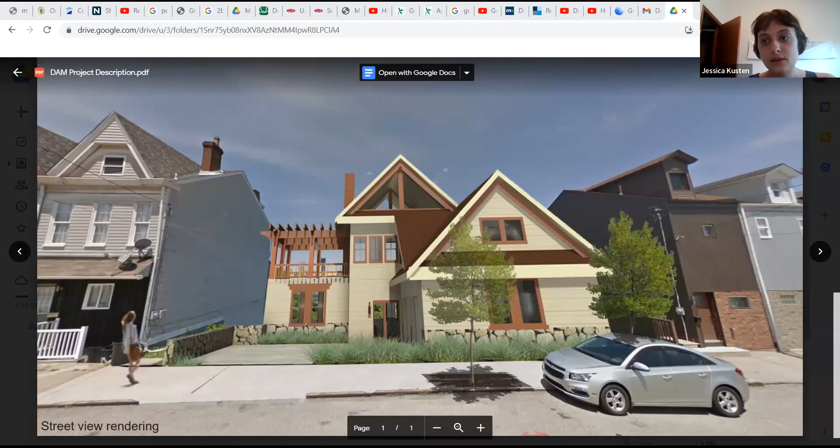All right, so I'm starting with a render of how the house would look on the street. There's a significant setback for a portion of it, so it doesn't take over or appear too large or separate from the other houses. This is just a render, but actually it's a pretty good depiction of what it would look like, so it looks pretty close to what it will be.

Yeah, definitely. We're trying our best to comply with all of the zoning regulations, and I think so far we are succeeding. There are requirements around landscaping to shield parking out front, and requirements limiting the size of retaining walls, so the house isn't such an imposing or bad presence on the street.

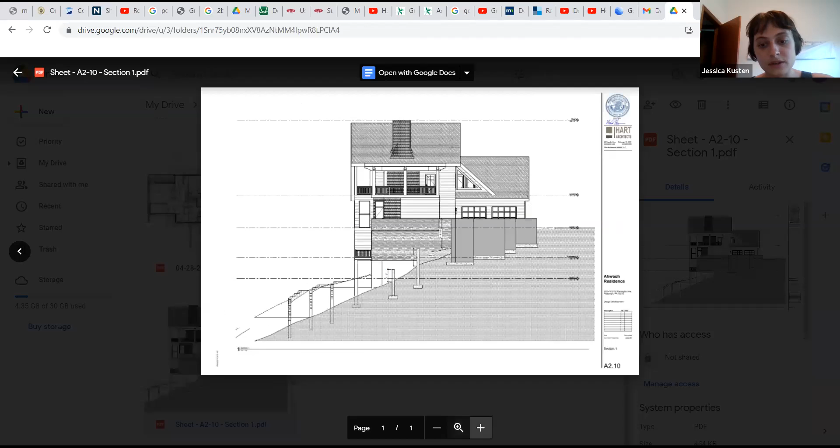So this is what the neighborhood would see. We're also working on stabilizing the slope because this is a large building with significant excavation involved. I think a main concern is the amount of excavation that will happen, and we're moving forward responsibly, designing retaining walls that keep the slope stable while also not being an oppressive presence on the hillside. The plans really follow the model of the rest of the houses on the street as well. There's a floor below grade, and then two stories above, so it doesn't divert too much from what's already there.

Sorry to interrupt, but is this in the steep slope overlay district in the zoning district? Yeah, it is. Okay, so you're required to go to the planning commission first to get approval? Okay, thanks, yeah.

So what will happen is after these retaining walls go in, the whole thing will be landscaped. The goal is that in the end, the slope or landscape doesn't appear as touched as it will be. That's also for soil stabilization too.

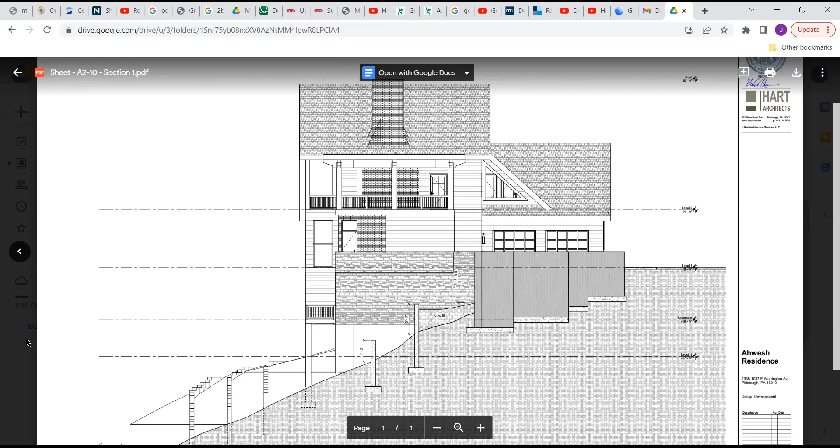So I think if this would count as the formal meeting, ideally this would have as close as possible to what would be the final design. If there are some adjustments, I can double check with the staff for the ZBA. It may be the case that if it's substantial enough, you might need to come back for an informal meeting, still held with the community, but not counting formally, in the sense that it wouldn't require another 30-day period for public comment, but it might still be important to come back and update the community about the change with the variance needed.

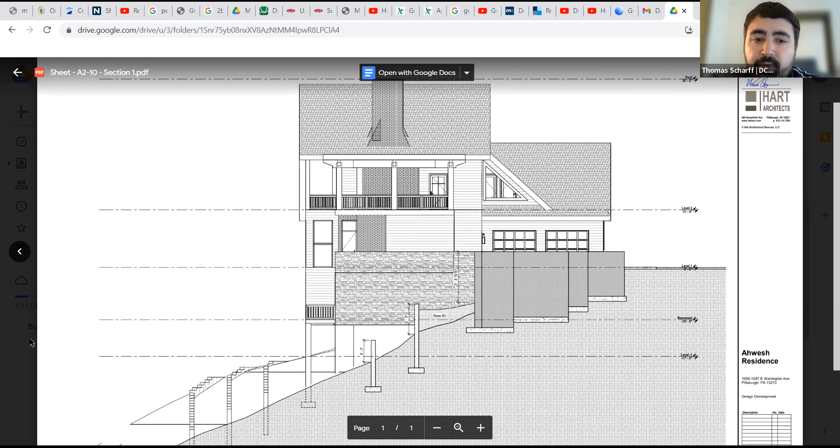That's one possibility, one route. I would have to check with fellow staff as to, depending on what happens, if something would be needed or not, but there is a possibility of that.

Yeah, okay. I'm not trying to torture these folks. I've been on the developer side, and I know it seems like these meetings just are endless, having to get so many approvals from so many people. So I'm very sympathetic to that.

I think our questions and the issues may be different if there's an inability to comply with the zoning code as written. If there's no variances required, we don't really have much room to say anything at all, other than thank you for making sure we're in the loop. But it's a very different situation depending on the scope of a variance, as to whether or not we would have to go back and pass along those concerns to our board, because we're only a couple board members here, and we don't really make any decisions on our own. So it's just helpful to know what the issues are.

I'm fairly new to the RCO and DAM process myself, and I just want to be clear as to when the timing of these things should occur, and what makes the most sense. So thanks for answering to the best of your ability, Thomas.

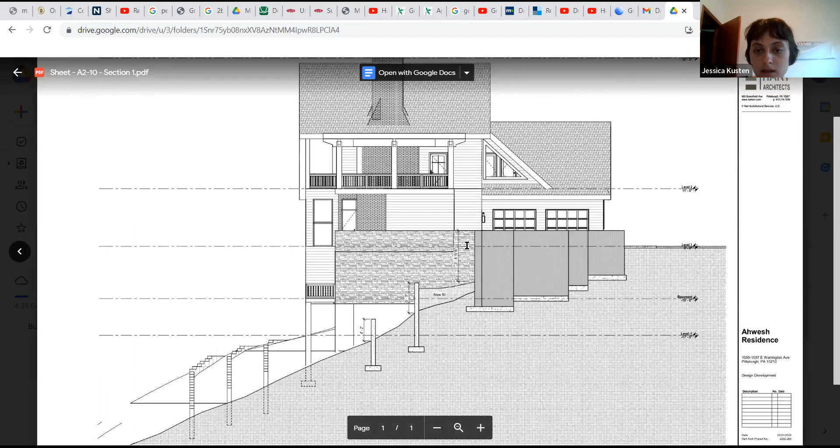How many walls were there? Five? Was I reading that section right? You were at 5 or 6 walls, or were 3 of them the house, or can you just... Yeah, this right here, these are below grade. These hold in the parking lot. I'll pull up the site plan, so maybe that'll help.

And again, I don't really even want to be the adjudicator of this. I want you guys to have a nice project that you can get through zoning, that isn't going to run you into trouble, isn't going to run afoul of the slopes. Yeah, no, I appreciate that.

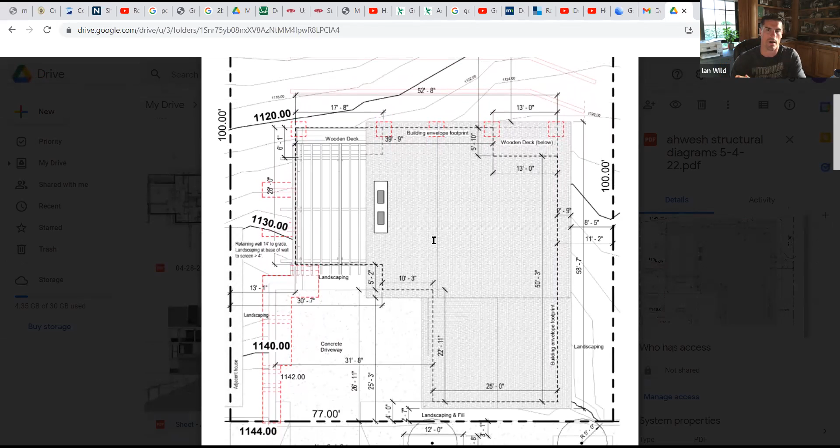And that's something that we, Jess, we can make a note to look more into the spacing of those retaining walls. But based on the project I did a couple of years ago, we had to build the retaining walls a certain way. So we're kind of following those guidelines.

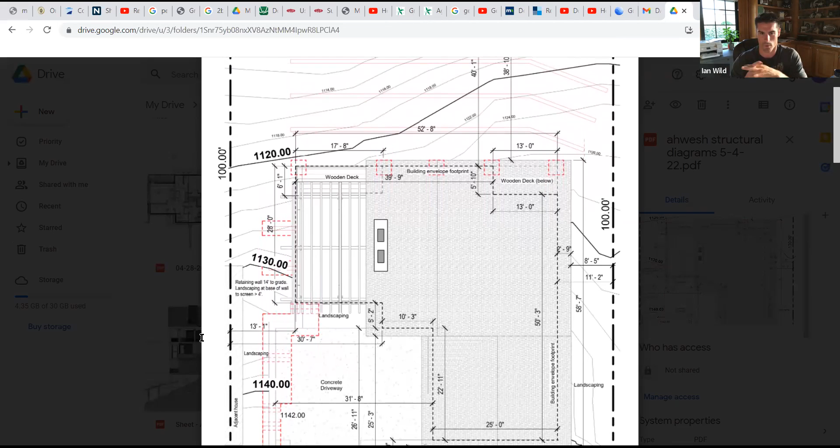And also, just the way that the slope is, we're trying to avoid having any zoning adjustments, right? So that's why we're having the retaining wall, so that we don't have a foundation exposed more than 10 feet, so that we don't have to get a variance approval. So we're going to try to stick with whatever zoning is requiring, whatever is within the code. That's what we're making the adjustments to meet the code, essentially.

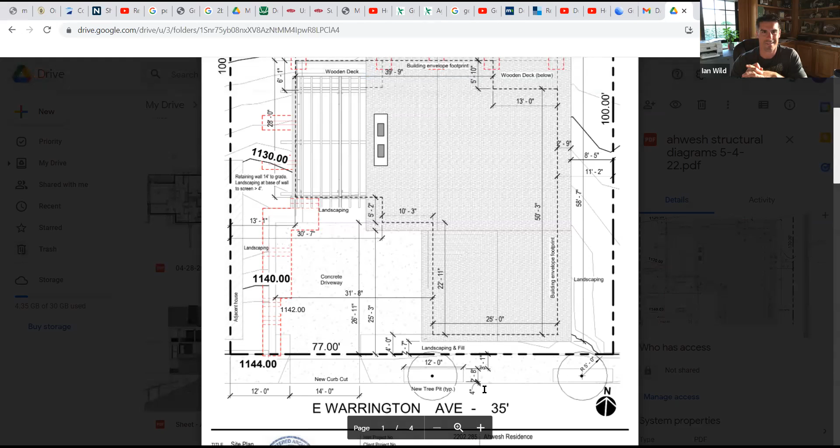It also involves a decent amount of landscaping and two new street trees. That's exciting, there'll be a lot of fresh air up there. We love our street trees, so that's fantastic.

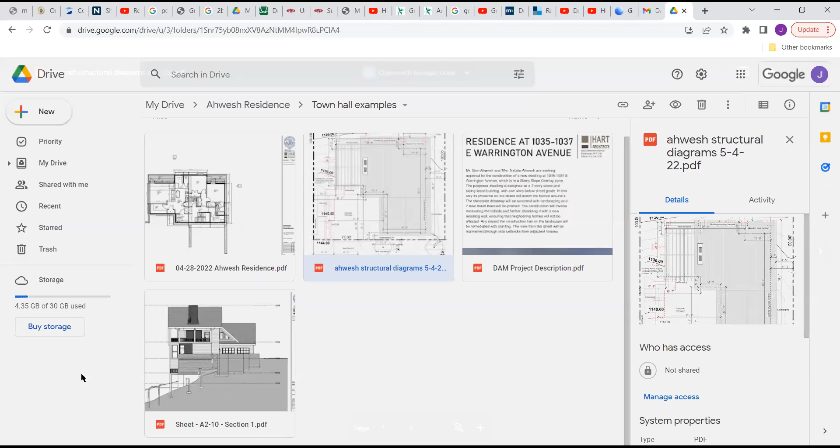It's important to highlight that the front yard parking will irk them, which might need a variance too. Well, there's a garage. Oh, I'm sorry, I missed the garage. Yeah, it's just a driveway, but that's why Jess added all the fancy pampas grass. I missed it in the rendering. Oh, I see, it's a side entry. Yeah, that's why I missed it. Okay, got you.

And all of this gets landscaped, meeting the screening requirements. Got it, I thought it was just a parking pad, which I know they will argue with you about a little bit. Cool.

Do we have anyone else on the call before we get further along, just to make sure any other questions are being answered as we go through? I just see Karen, Brad, everyone else is making sure their beers are cold enough for the game and the wing orders placed. So, priorities, I get it.

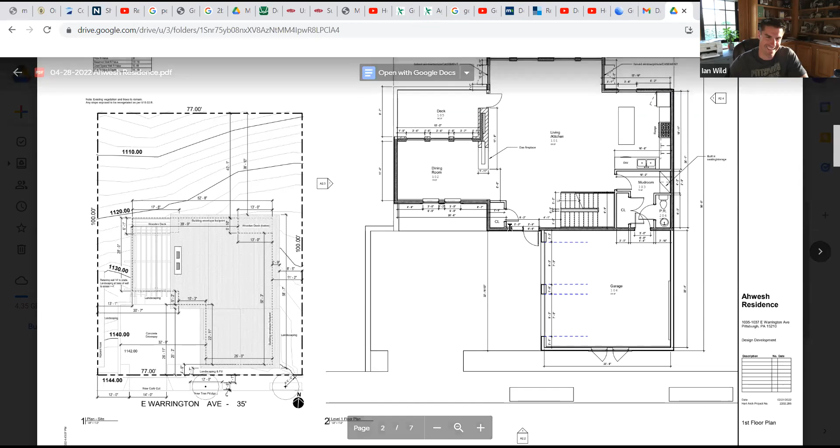Okay, so that, this has all been very helpful. Anything else you want to tell us about this particular project?

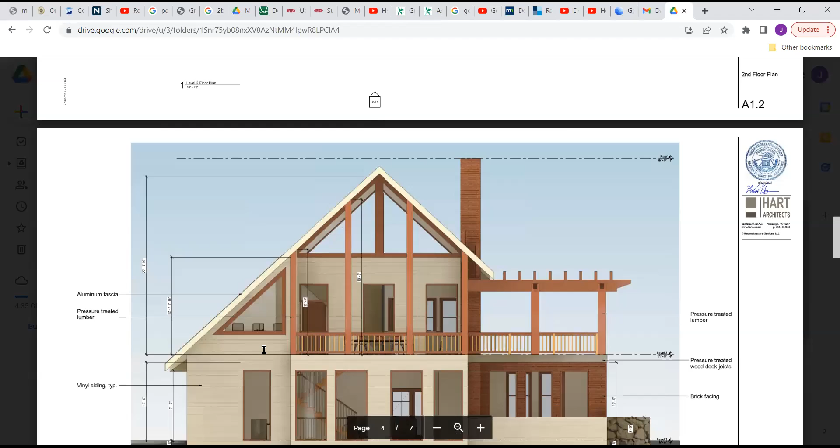Do you have anything like a Google Maps type thing that shows where this is in relation to the neighborhood in general? If you don't, that's okay. Everyone has Google Maps, they can check. I have Google Earth open in a new tab, so I might as well.

Let's see, 1035 East Warrington. Interesting. 1033 - because I don't think they're just setting the address now, I don't think. Oh, they're making it 1033. Well, that's the neighbor, there's no address to it right now. I have the lot consolidation. Okay, cool.

You're consolidating two lots? There's actually three lots. One lot is like nine feet, but yeah, there's actually three lots.

Cool, so this is why it is a steep slope. And while there's a lot of vegetation here, there are only a few trees and we're not coming close to those. Our construction stops basically here. Yeah, this is great, this is really helpful to kind of get some perspective on topography and location. Thanks for taking us through this.

There's that strip of shops. Can you go to the street view, Jess? Yeah.

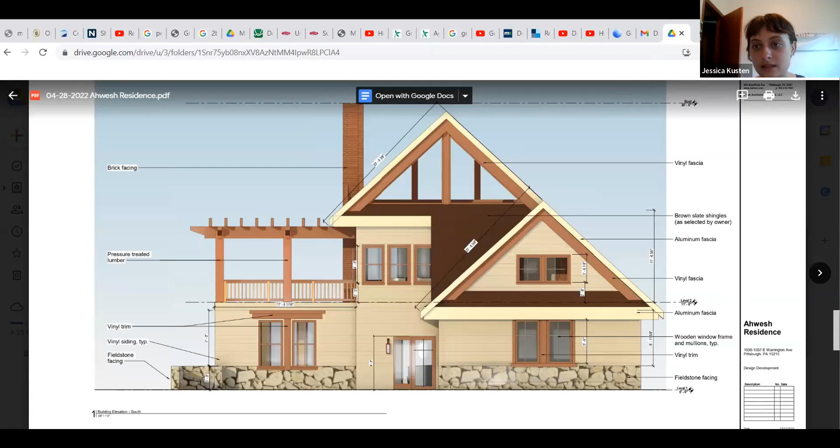Can you show me the facade that faces the city? Just a second, one of those renderings you had. I saw it briefly when you were scrolling through them, I was just interested in it—the side that faces the city. There we go.

This is definitely being changed. This doesn't include the new retaining walls. It'll be finished when the structural engineer gets back and I know exactly where the retaining walls are going to be. So all that exposed wall and concrete won't be showing.

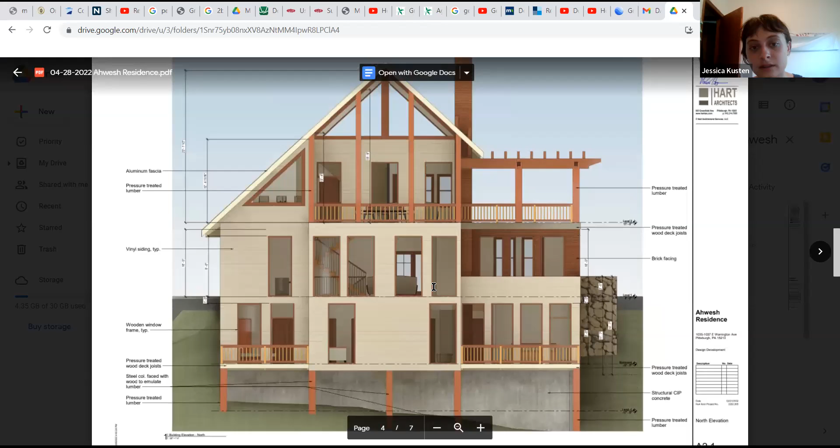Okay, yeah, that was where I was headed with this—it's kind of just plopped onto the site versus responding to the slope of the site.

Yeah, that's where we're going to add the walls. Depending on the slope, instead of putting wood decks there that are suspended with the retaining walls, we may just make them patios that are grade level. But it depends on how the slope and retaining walls turn out.

Thanks, I really appreciate your time. Yeah, for sure. Cool, all right.

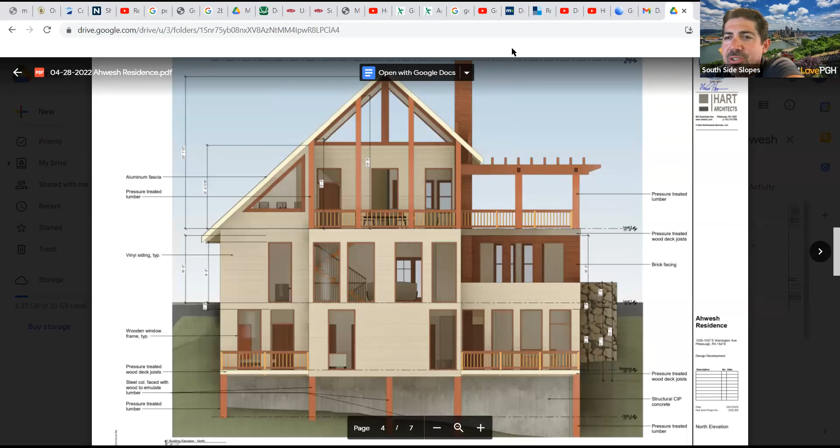We have that. Do the one where the dog pulls the plug out while people are trying to deal with technical difficulties—there you go. It's up in the chat there.